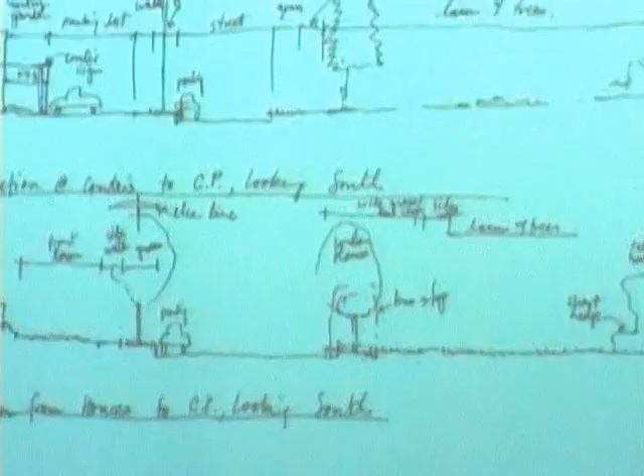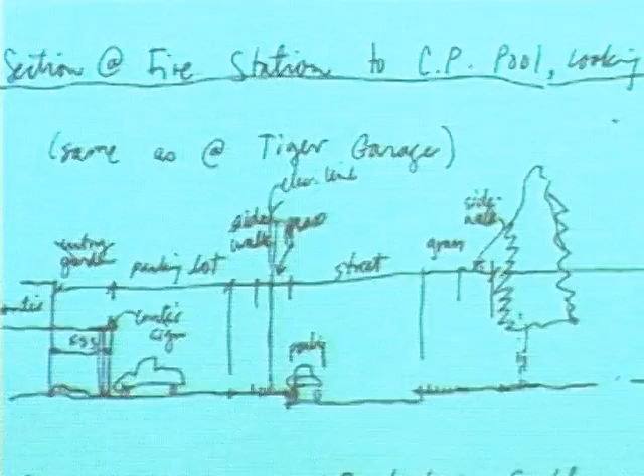We first did some analytical work, and Holly is going to take you through some of the relevant existing conditions we determined as we walked the neighborhood. These are important because of the history of the neighborhood and the street. Existing conditions indicate how the buildings, sidewalks, and streets have been used over the past 200 years. As designers, we can analyze these dimensions, elevations, and sections, and look for solutions to really localized problems.

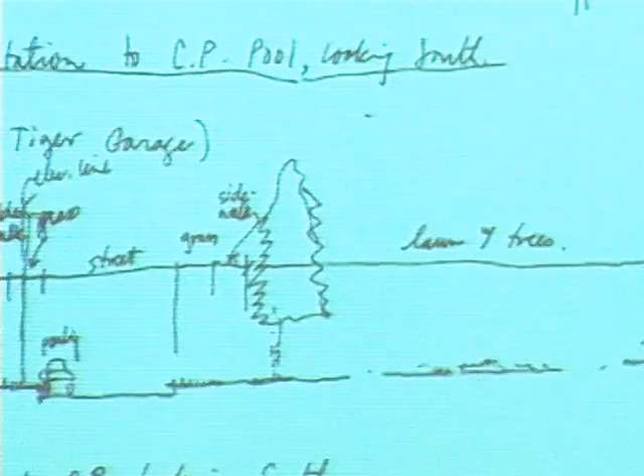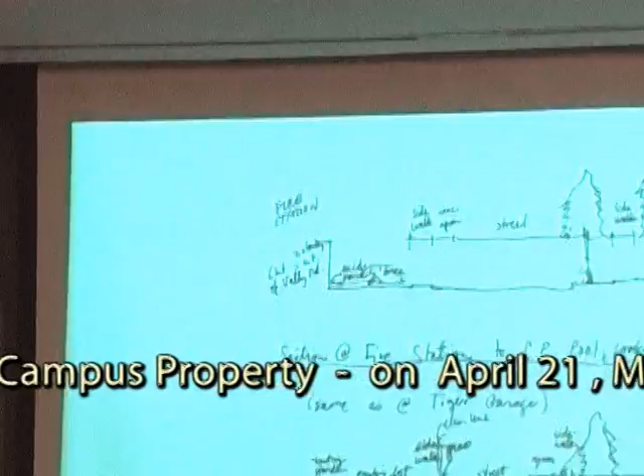There are a number of utility poles in unfortunate locations. There are trees in wonderful, extraordinary shape that need to be enhanced and preserved, and there are trees that have been chopped and butchered and damaged, and you can see now they're on the downhill slope.

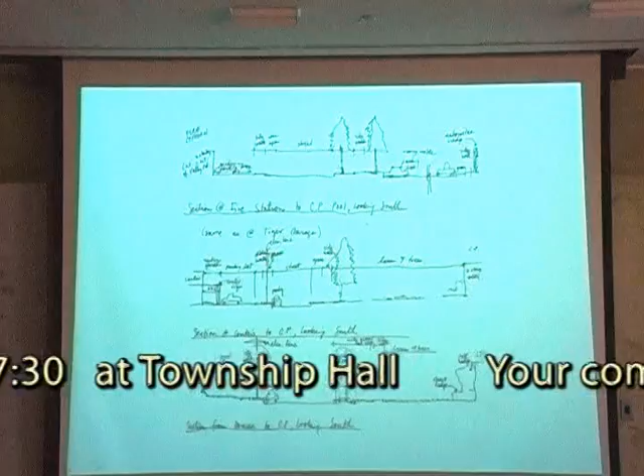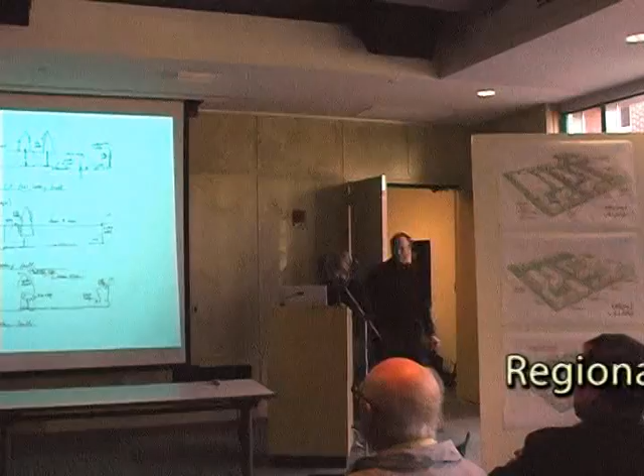So through design and through looking at these details, we came up with some consistency of how the street presently works. Just push that button right there. There it is.

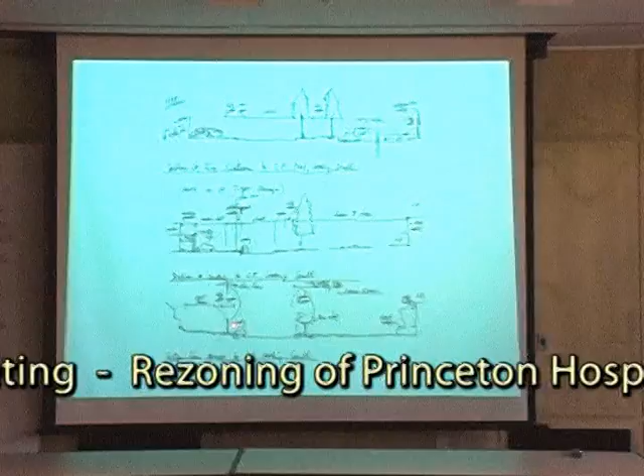So these sections start pretty much down near the town hall, and what we did is we moved up the street into town. There's a very different character at the north end of the street. It's much more open, less defined by buildings on both sides, particularly when you're at the parking lot at Community Park Pool.

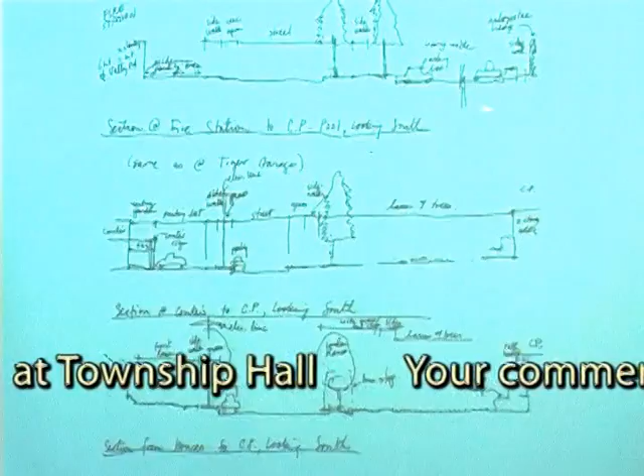There's a big open space on the west side of the road, and because of the fire station and garages, you have parking and a big open space on the right side of the road. What I tried to show is the relationship of the trees—these are the pine trees that at one point blocked the cars parked at Community Park Pool. They're now pretty tall, and you actually see under them and see the parked cars anyway.

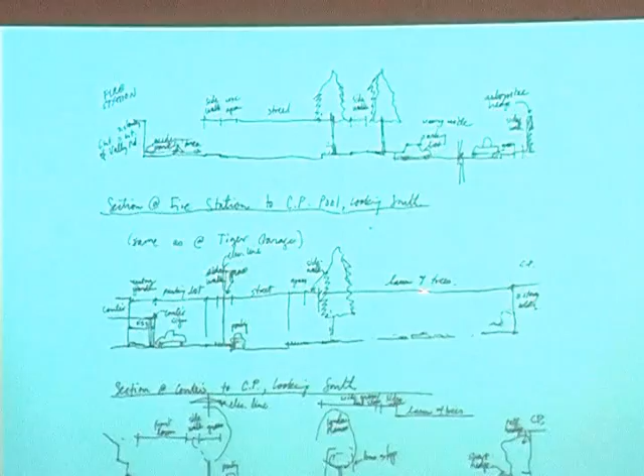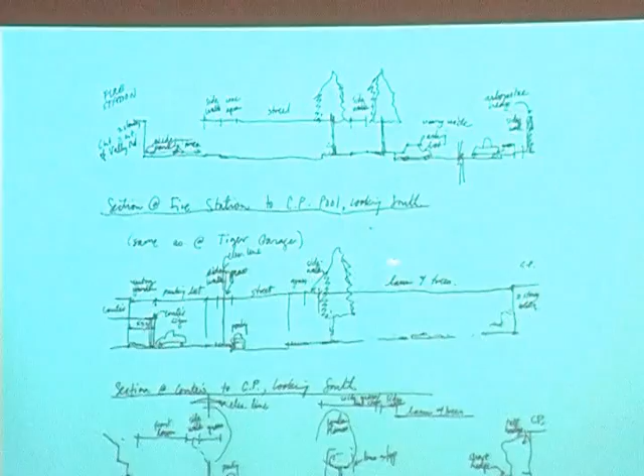And the curbs and the planting strips and the little details that, even though I live in that neighborhood, I walk down the street and don't consciously register this stuff. So this was a good exercise for me to get out there and record what was happening along the street, and it allowed me to see stuff I'd never noticed before.

For instance, the parked cars are on the east side of the street in the township, and on the west side of the street in the borough. Just a funny thing that doesn't necessarily have any implications, but if you're thinking of putting in a bike path, it might matter, which is something we'll get to towards the end.

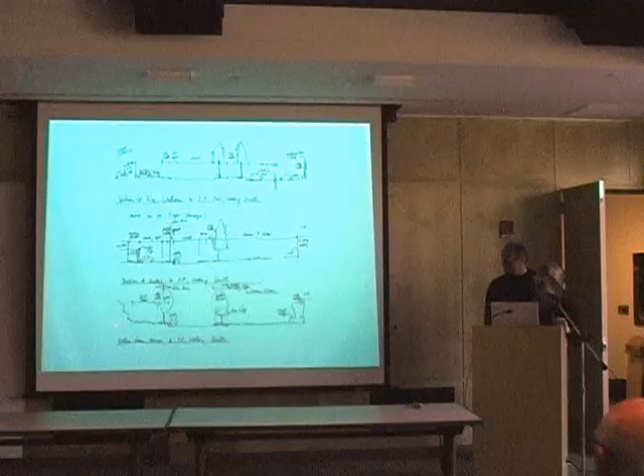But what I think you're beginning to see as we're moving towards town is you start to see on the left a house with a porch, a front lawn, then a sidewalk, then a planting bed with a tree, then the street. And as we get closer into town, that becomes the norm.

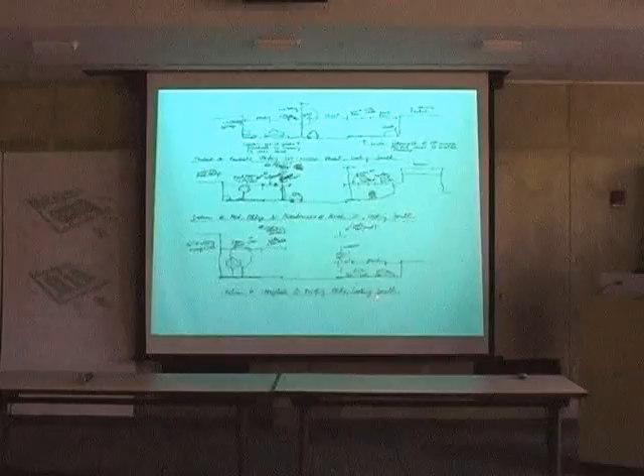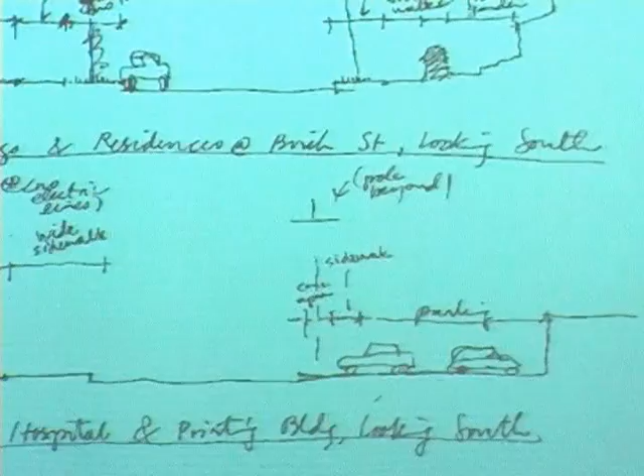That's one of the differences you see in section between Witherspoon Street and downtown, where buildings come right up to the edge of the sidewalk without that transition. So the sense of houses, porches, front yard, then sidewalk, then street is what we determined as the structure of Witherspoon Street.

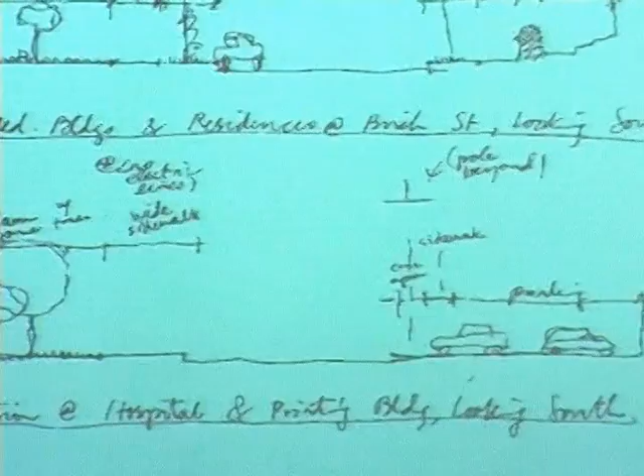And what we're hoping to show in the following slides is where there are places where that structure gets messed up, where there are mistakes and things that need to be amended. Thanks, Holly.

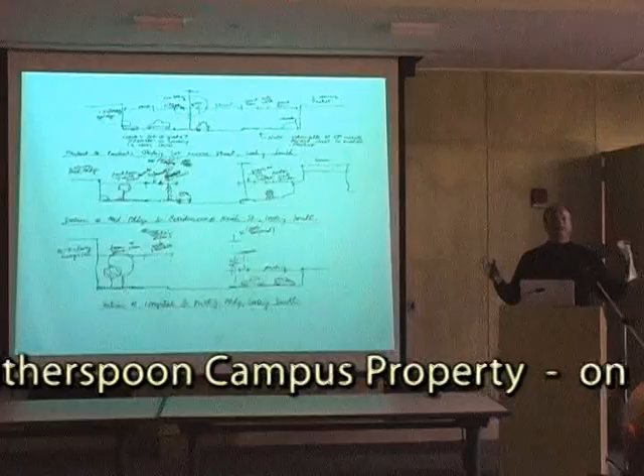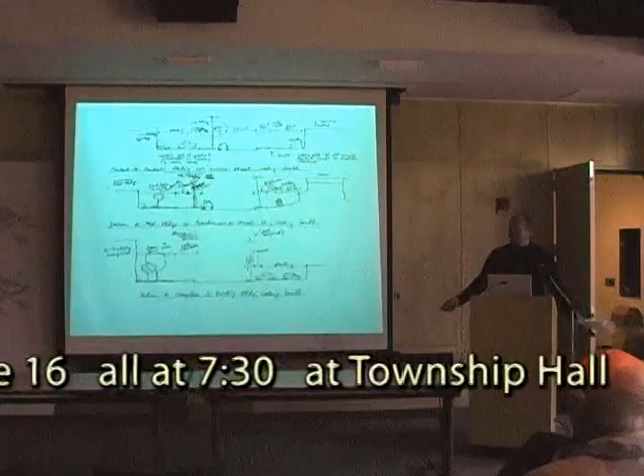So the spatial character and quality of street experience changed dramatically moving from township into the borough. The street spatial character narrows as the buildings pull closer to the street line. Here you see in her sketch the existing tall hospital building, and how it looms over the street section. That continues as the street actually starts to narrow.

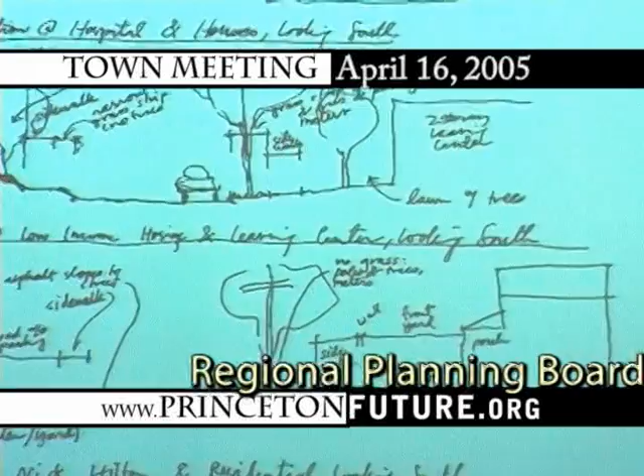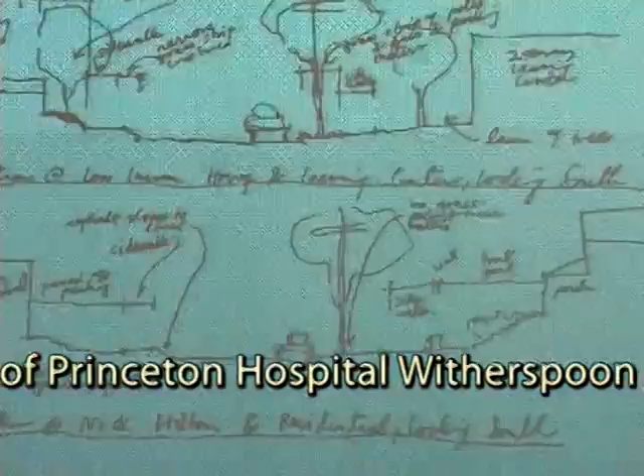Here's the section down by the Clay Street Learning Center, where the houses start to develop a steep slope on the eastern side of the street. The same thing starts to happen as we move closer into town on the western side of the street, especially right below Tory Lane, across from where the old Chinese restaurant is being rebuilt into a new Chinese restaurant.

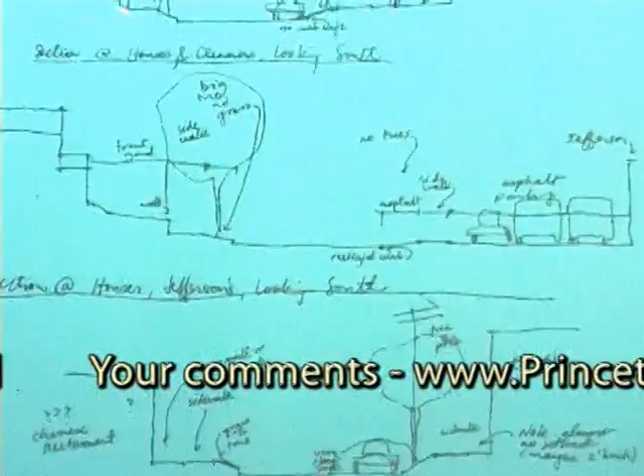And here again we see a series of slope edge conditions. This is the street bed, a steep slope up to a sidewalk, which then has a series of steps going up from there into the residence.

There's a couple of commercial locations, like Jefferson's for example, off of the street. They have a paved parking lot of some sort. Some of these parking lots are in use, and some of these paved areas in front of the buildings that had been parking lots are no longer in use.

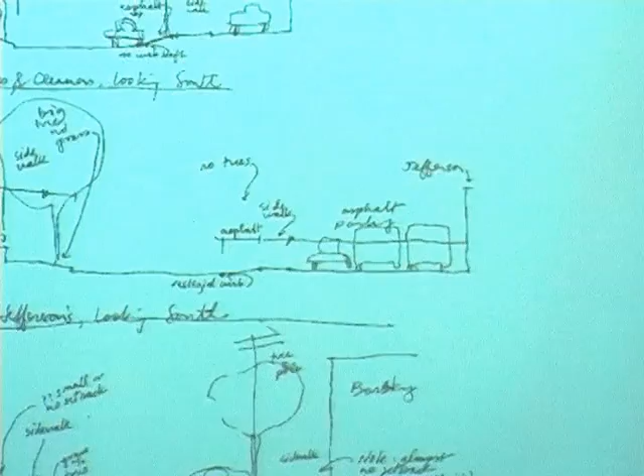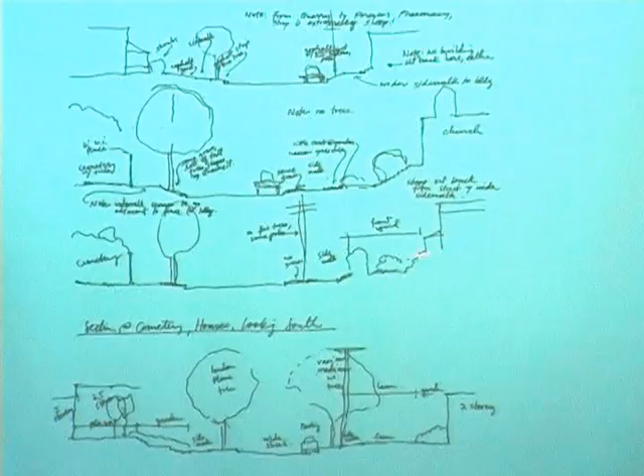And finally, as we get close into town, the cemetery occupies the eastern side of Witherspoon Street, and the western side has a series, generally at corners, of churches and private residences in between.

In most cases the churches have a sort of paved sidewalk area in front of them for gathering when churches are grouped or in use on the weekends or evenings, and those are areas that we want to enhance and improve a bit.

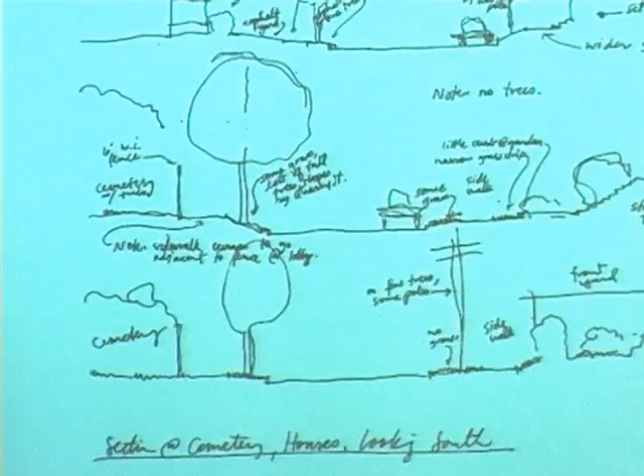So we're going to start here at this corner right up here and now turn around and walk our way back up the street heading north, looking at some images and some suggestions.

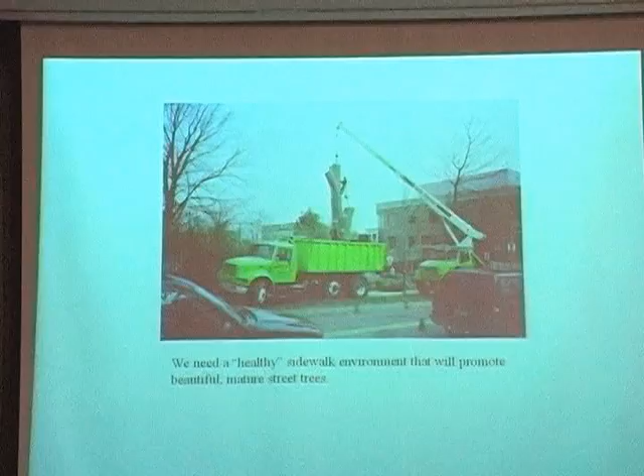One of our first goals is that we want to establish a very healthy environment for the street trees along Witherspoon Street. We want to create in our new sidewalk detailing a way where the existing mature trees can be ensured of as long a survival as possible.

And that the new trees that get planted, either to replace trees that have died or to fill in certain gaps in areas that we feel are missing, have the best chance of surviving for 100 years down the road.

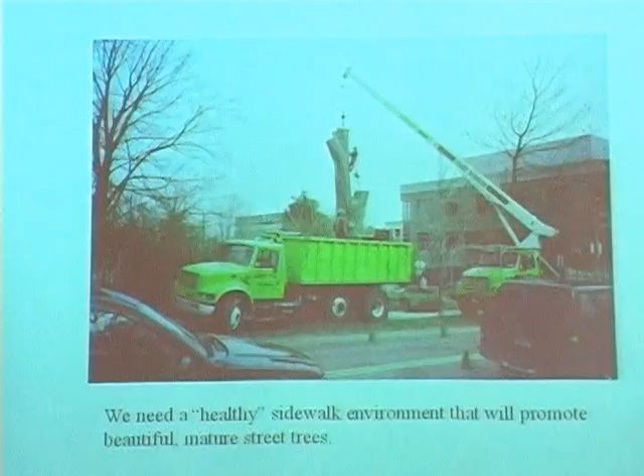So they can replace the mature canopy that presently exists. It is a very unfortunate and sad fact to us that trees don't last forever.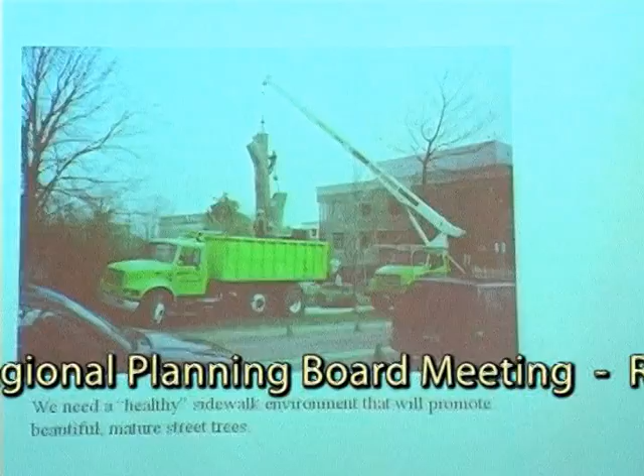As much as we want, the trees are part of an evolving, ongoing organic process. They're planted, they grow, they're mature, we love them, and sometimes, for various reasons, at their own cause or nature's cause, they have to depart and move on.

We should do everything we can to save the mature ones we have and to promote a healthy life for the new ones that we plant.

On the west side of Witherspoon, in front of the Arts Council, already planned is to widen that inbound lane with a right-hand turn lane that will allow people to turn from Witherspoon onto Paul Robeson, making a right-hand turn.

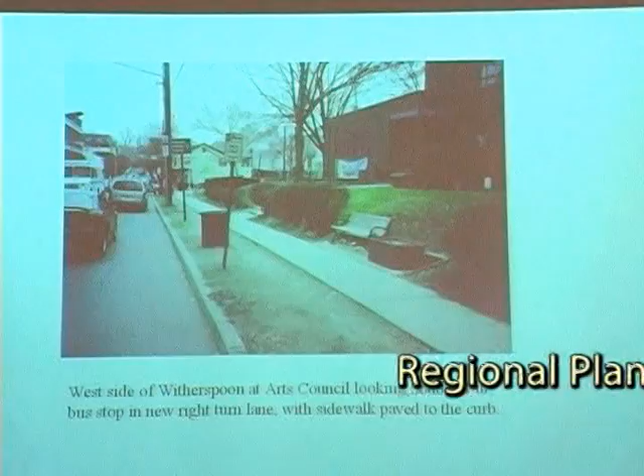Without backing up people going through or trying to turn left. In that right-hand turn lane, we propose that there be installed a bus stop. That's largely the condition that exists today, that the bus stops in the traffic lane.

It will be slightly improved when the bus pulls over and stops in a right-hand turn lane to allow through traffic to continue down the street.

We advocate that the sidewalks now be continued to the curb throughout what I might call the southern half of Witherspoon Street. Throughout much of what is the borough, we advocate that the sidewalks be continued to the curb and this planting strip here be eliminated.

We actually advocate that the sidewalks be a media that supports the growing of trees and doesn't fight tree roots. We don't want to use poured in place concrete. We want to use a unit paver that's designed like, imagine a little brick walkway.

However, these bricks are pretty sophisticated because they have gaps in them of about a quarter inch around their edges, and they allow water to filter through the sidewalk, so they allow water to get to tree roots underneath the sidewalk without completely blocking it.

If we carried the sidewalk all the way to the curb in a way that would not allow water to feed the tree roots, we would be diminishing the tree's chance of survival, not enhancing it.

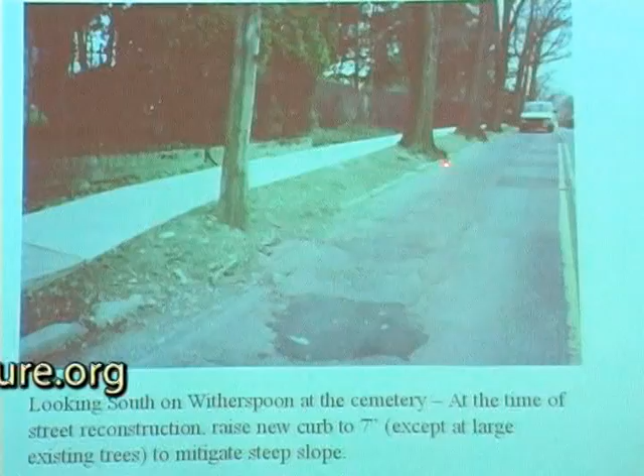We believe when the street is repaved and reconstructed, this curb should be raised up to 7 inches, and around the trees the curb should be dropped down flush with the street bed and brought back up a few feet beyond the root base to not chop at the bases of those trees. If we cut at the roots, or pour hot asphalt right on top of them, we will undoubtedly cause damage to these trees.

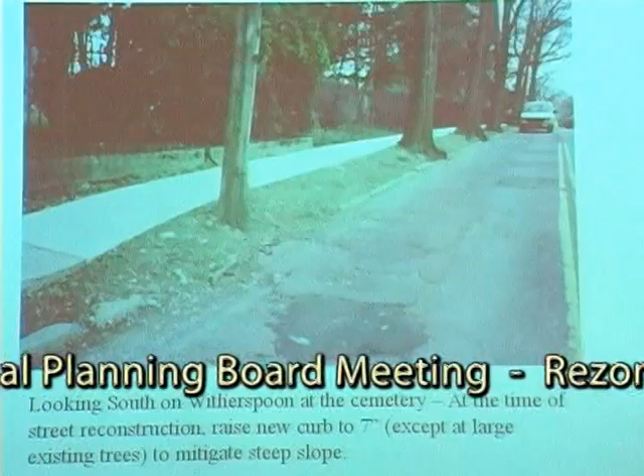So we want to bring the sidewalk detailing to the curb where we can't manage to grow any grass, and we want to enhance the area around the trees so they have space to grow. New trees that we plant, we don't want to plant in this little 18-inch strip on the edge, which we call the grass strip. We actually want to plant new trees farther away from the street curb, so as those trees grow up, their root bases will not try to do this tug of war with the street bed.

So in some areas along the street, Witherspoon Street is crowned roughly at Quarry. And crowning means that's the high point. So it moves uphill to that point, then turns around, slopes down a little bit, and then down around Robeson, turns around, and starts gently sloping back uphill to Nassau Street. In this area, you see the significant steep slope issue on the west side of the street — not quite so bad here that we couldn't simply reconstruct along the grades that exist.

Notice along the right-hand side of the image, or the western side of the street, how much the utility lines have won out the battle with the trees. Notice how healthy these trees are, and notice how much trouble the few trees that exist in here are having. We're going to show you some more slides and talk about what we think we should do about that in a moment.

We have 2 strategies for this problem. Strategy number 1 we've drawn over here on this drawing. If you look here, the site we're talking about is right there between Quarry — that's Shirley Court — and Torrey Lane coming in right there. For that one little block, we propose one of two things: either we extend this curb out 8 feet and eliminate parking for 100 feet, allowing the sidewalk to widen and slope gently at a grade anybody can accommodate, into what is effectively a neck down on Witherspoon Street.

Neck down brings me into one of our other goals — we heard from numerous people that they want Witherspoon Street traffic to slow down and be more aware of children crossing the street, of adults too — we don't want to run over the adults either, of everybody crossing the street. We want Witherspoon Street to be more friendly for pedestrians and find a way to slow traffic without necessarily putting in traffic lights or even stop signs.

When we posed in our workshops, 'what if I put a light here and here to slow traffic down?' people invariably said, 'oh, I don't really want that, I just want everyone to drive 20 miles an hour.' Well, the way to do that is at certain points of the street to narrow it, change its direction, or create a visual interference through a heavily striped crosswalk or crosswalk-embedded lights in the roadway, as they've done down at McCarter. Little strategies like that force drivers to be more aware and therefore slow down to interpret all these narrowing signals they're being given.

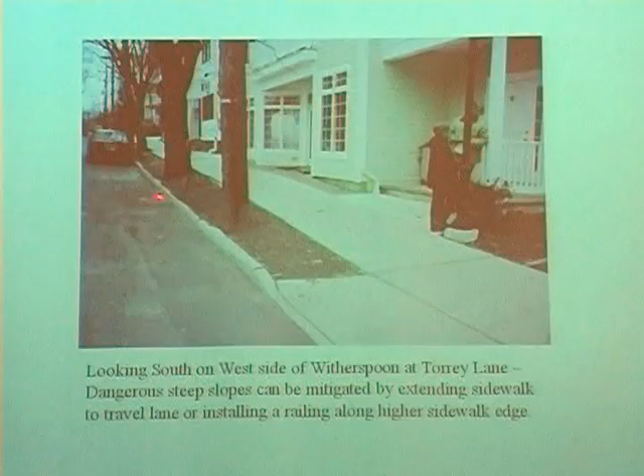This is looking back into town, south from where we propose the other end of this slope condition would be. Right here, where this new building has been built, they actually cut the sidewalk slope out and pitched it more evenly to the street. Pretty much at Torrey Lane, this problem solves itself for a while.

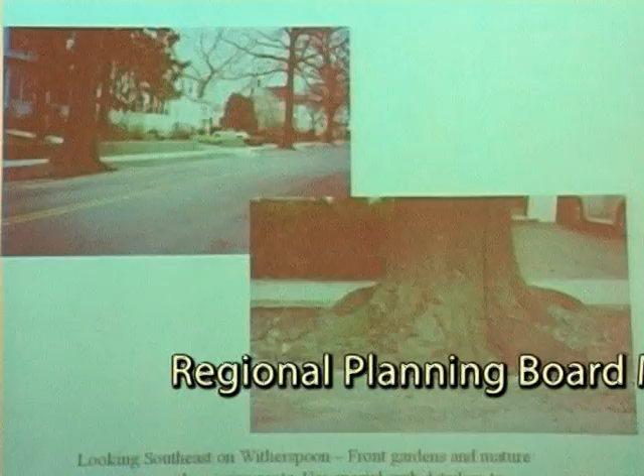Now, looking across the street in this neighborhood, again we see these trees along the eastern side that have done what they can to survive, and we want to do everything we can to protect these trees and save them. So that doesn't allow us to raise the street a great deal here.

Some of these slope issues, you might say, well Kevin, why can't I just raise the street up a bit and come closer to the height of the existing sidewalk? Our problem is across the street, we don't have that steep slope condition as bad as we do on the western side of the street. So we can only raise the street bed a few inches to gain a little elevation at these curbs.

And again, we see this condition along the western side of the street of extreme disrepair, bordering on danger. However, we also see the remnants of the conditions that Holly explained: the front porch, the front garden, the steps up to the house, and the tree.

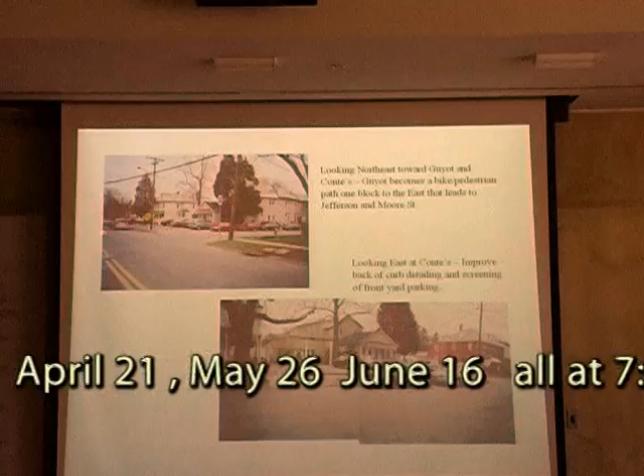And we actually want to set up another crosswalk location here and really suggest, off our study, an enhanced system of circulation that connects Moore, Jefferson, Harris, across into Witherspoon here, where there's a significant amount of children and pedestrian circulation.

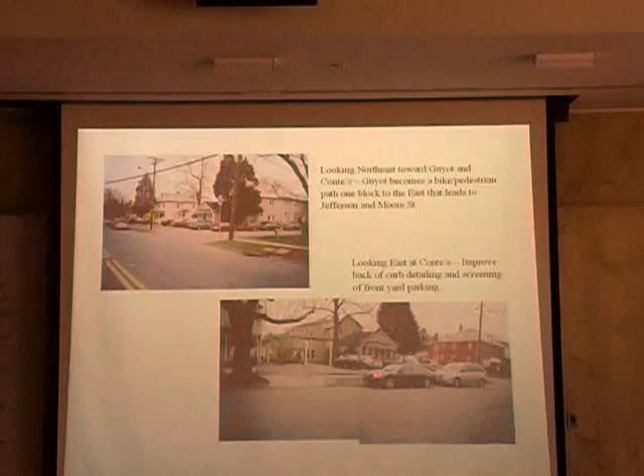Again, some of these curb details we want to improve. Here's the existing Valley Road stuff. We want to protect these trees.

We want to add as much green as we can to the township side of these parking lots, although we realize a lot of those people need those parking lots, and there isn't a great deal of hope for removing the macadam. But we could maybe improve this curb edge location where there is some delineation of entrance and exit, and some clearer system of where cars shouldn't be parking on the sidewalk, and the sidewalk shouldn't be given completely over to a vehicle facility.

We feel the utility lines are a major problem on the street, and we want to advocate that the overhead electric, cable, and TV lines be buried under the new sidewalk running down the western side of Witherspoon Street.

We understand that's an expensive endeavor. However, we want to point out the least expensive time ever to do it is when the street is being rebuilt. And when the street is being rebuilt, and the sidewalks are being rebuilt, and the curbs are being rebuilt, the additional cost to take the utilities off the poles and put them underground is not as high as it would be if you started to do it as a standalone project.